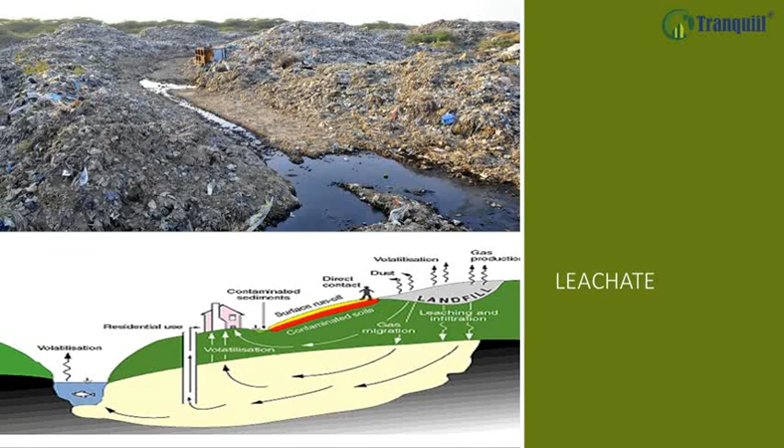Leachate from a landfill varies widely in composition depending on the age of the landfill and the type of waste that it contains. It usually contains both dissolved and suspended material. The generation of leachate is caused principally by precipitation percolating through waste deposited in the landfill. Once in contact with decomposing solid waste, the percolating water becomes contaminated, and if it then flows out of the waste material it is termed leachate.

Additional leachate volume is produced during this decomposition of carbonaceous material, producing a wide range of other materials including methane, carbon dioxide and a complex mixture of organic acids, aldehydes, alcohols and simple sugars.

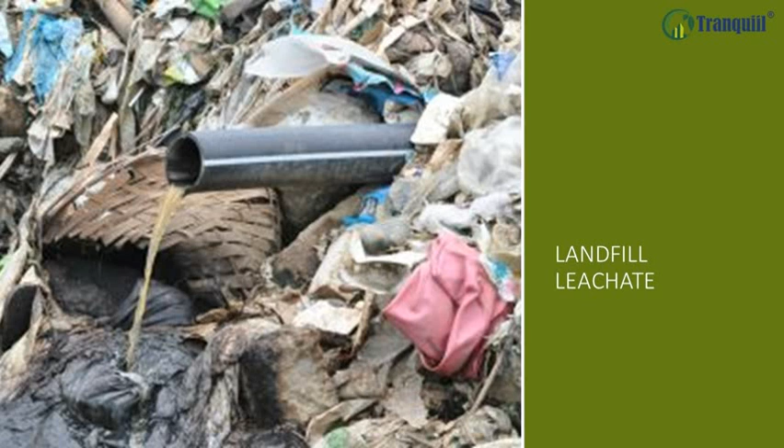The risks of leachate generation can be mitigated by properly designed and engineered landfill sites, such as those that are constructed on geologically impermeable materials or sites that use impermeable liners made of geomembranes or engineered clay. The use of linings is now mandatory within the United States, Australia and the European Union except where the waste is deemed inert. In addition, most toxic and difficult materials are now specifically excluded from landfilling.

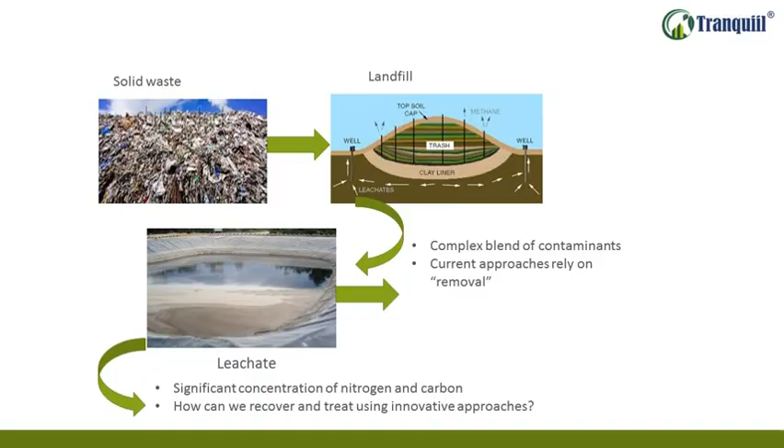However, despite much stricter statutory controls, leachates from modern sites are often found to contain a range of contaminants stemming from illegal activity or legally discarded household and domestic products. When water percolates through waste, it promotes and assists the process of decomposition by bacteria and fungi. These processes in turn release byproducts of decomposition and rapidly use up any available oxygen, creating an anoxic environment.

In actively decomposing waste, the temperature rises and the pH falls rapidly, with the result that many metal ions that are relatively insoluble at neutral pH become dissolved in the developing leachate. The decomposition processes themselves release more water, which adds to the volume of leachate. Leachate also reacts with materials that are not prone to decomposition themselves, such as fire ash, cement-based building materials and gypsum-based materials, changing the chemical composition.

In sites with large volumes of building waste, especially those containing gypsum plaster, the reaction of leachate with the gypsum can generate large volumes of hydrogen sulfide, which may be released in the leachate and may also form a large component of the landfill gas.

In a landfill that receives a mixture of municipal, commercial, and mixed industrial waste but excludes significant amounts of concentrated chemical waste, landfill leachate may be characterized as a water-based solution of four groups of contaminants: dissolved organic matter (alcohols, acids, aldehydes, short-chain sugars, etc.); inorganic macrocomponents (common cations and anions including sulfate, chloride, iron, aluminium, zinc and ammonia); heavy metals (Pb, Ni, Cu, Hg); and xenobiotic organic compounds such as halogenated organics, PCBs, dioxins, etc.

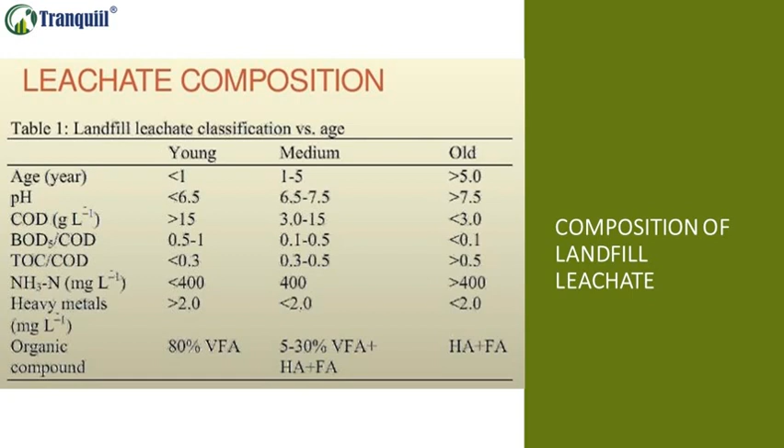In older landfills and those with no membrane between the waste and the underlying geology, leachate is free to leave the waste and flow directly into the groundwater. In such cases, high concentrations of leachate are often found in nearby springs and flushes.

As leachate first emerges, it can be black in color, anoxic, and possibly effervescent, with dissolved and entrained gases. As it becomes oxygenated, it tends to turn brown or yellow because of the presence of iron salts in solution and in suspension. It also quickly develops a bacterial flora, often comprising substantial growths of Sphaerotilus natans.

The primary criterion for design of the leachate system is that all leachate be collected and removed from the landfill at a rate sufficient to prevent an unacceptable hydraulic head occurring at any point over the lining system.

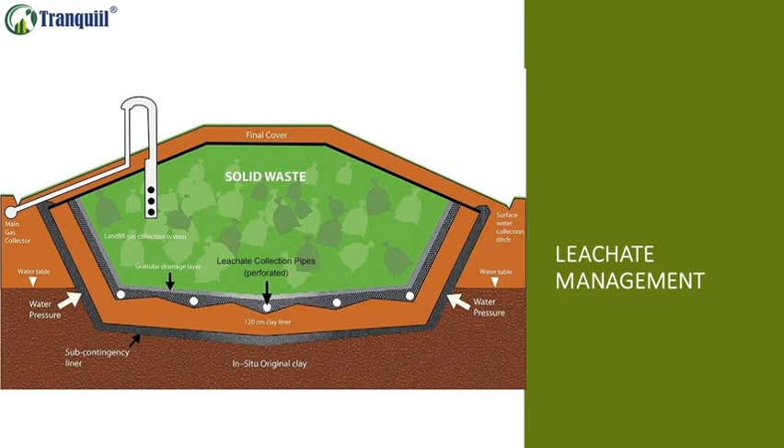There are many components to a collection system, including pumps, manholes, discharge lines, and liquid level monitors. However, there are four main components which govern the overall efficiency of the system. These four elements are liners, filters, pumps, and sumps.

Liners, natural and synthetic liners, may be utilized as both a collection device and as a means for isolating leachate within the fill to protect the soil and groundwater below. The chief concern is the ability of the liner to maintain integrity and impermeability over the life of the landfill. Subsurface water monitoring, leachate collection, and clay liners are commonly included in the design and construction of a waste landfill.

There are several types of liners used in leachate control and collection. These types include geomembranes, geosynthetic clay liners, geotextiles, geogrids, geonets, and geocomposites. Each style of liner has specific uses and abilities. Geomembranes are used to provide a barrier between mobile polluting substances released from wastes and the groundwater.

In the closing of landfills, geomembranes are used to provide a low permeability cover barrier to prevent the intrusion of rainwater. Geosynthetic clay liners (GCLs) are fabricated by distributing sodium bentonite in a uniform thickness between woven and non-woven geotextiles. Sodium bentonite has a low permeability, which makes GCLs a suitable alternative to clay liners in a composite liner system.

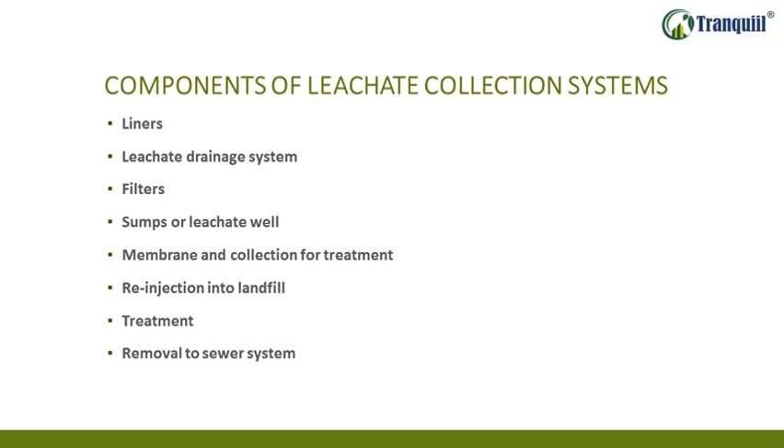Many older leachate streams also contained a variety of synthetic organic species and their decomposition products, some of which had the potential to be acutely damaging to the environment. The risks from waste leachate are due to its high organic contaminant concentrations and high concentration of ammonia. Pathogenic microorganisms that might be present in it are often cited as the most important, but pathogenic organism counts reduce rapidly with time in the landfill, so this only applies to the freshest leachate.

Toxic substances may, however, be present in variable concentrations, and their presence is related to the nature of the waste deposited. Most landfills containing organic material will produce methane, some of which dissolves in the leachate. This could, in theory, be released in poorly ventilated areas in the treatment plant. All plants in Europe must now be assessed under the EU ATEX directive and zoned where explosion risks are identified

to prevent future accidents. The most important requirement is the prevention of the discharge of dissolved methane from untreated leachate into public sewers, and most sewage treatment authorities limit the permissible discharge concentration of dissolved methane to 0.14 mg/L, or 1/10 of the lower explosive limit. This entails methane stripping from the leachate.

The greatest environmental risks occur in the discharges from older sites constructed before modern engineering standards became mandatory, and also from sites in the developing world where modern standards have not been applied. There are also substantial risks from illegal sites and ad hoc sites used by organizations outside the law to dispose of waste materials.

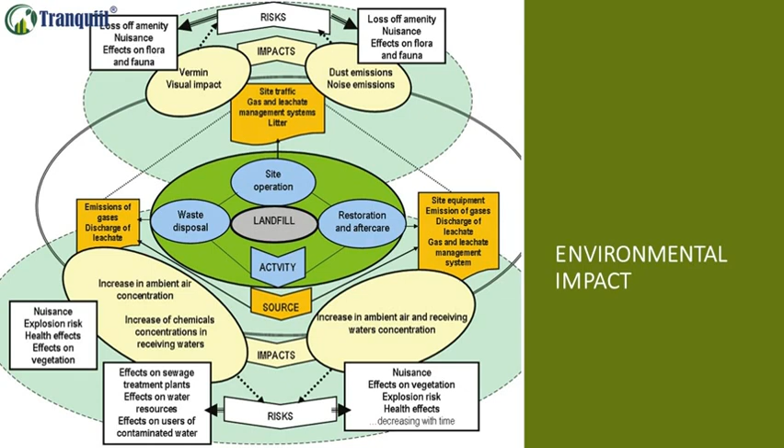Landfill leachate contains a large amount of organic matter and ammoniacal nitrogen. As such, it has become a complex and difficult issue within the water treatment industry. The activated sludge process has been found to be a good solution with low processing costs and is now therefore the core process for leachate treatment, especially for nitrogen removal. Treatment of leachate using the activated sludge process includes the removal of organic matter, ammoniacal nitrogen, and total nitrogen (TN).

The core method for the removal of organic matter involves anaerobic treatment supplemented with an aerobic process. Ammoniacal nitrogen is commonly removed using the conventional aerobic treatment, and advanced TN removal is achieved using endogenous denitrification or an anaerobic ammonium oxidation (ANAMMOX) process. Since biological processes are the most economical method for TN removal, a key issue is how to tap the full potential of the activated sludge process and improve TN removal from leachate.

Treating landfill leachate. Since leachate contains large amounts of organic matter and ammoniacal nitrogen, general disposal methods have included physical and chemical pretreatment followed by aerobic and anaerobic biochemical processes, concluding with further physical and chemical methods for final in-depth treatment. The main functions of pretreatment are to remove suspended solids, degrade some of the organic matter and ammoniacal nitrogen, reduce toxicity, and improve the overall biodegradability of the leachate. This is achieved through coagulating and stripping the ammoniacal nitrogen from the leachate.

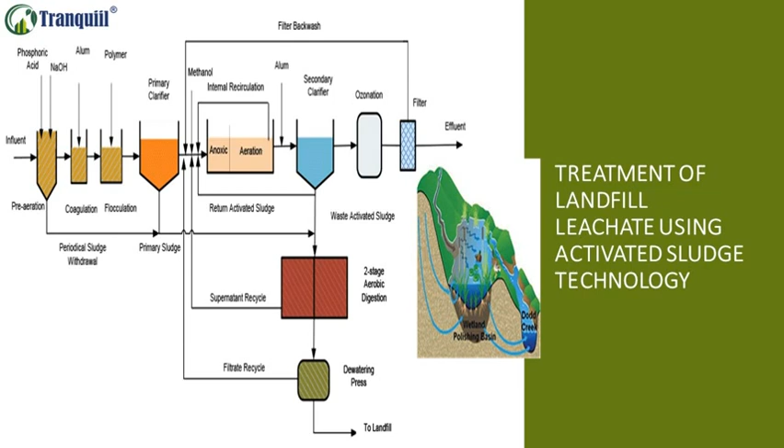In physicochemical treatment, the separation of suspended particles from the liquid phase is usually accomplished by coagulation, flocculation and sedimentation. Coagulation-flocculation processes have been widely used as alternative treatment to remove leachate pollutants such as BOD, COD, TSS, heavy metals, color, and nitrogen compounds prior to other treatment methods. It is often coupled with treatment methods like biological process, chemical oxidation, adsorption or filtration to achieve desirable effluent quality.

In spite of being economical, the dewatering and disposal of the precipitated sludge could be laborious and time-consuming. In this manuscript, coagulants and coagulant aids in landfill leachate treatment are briefly discussed with respect to their mechanism. Coagulation is generally defined as destabilization of a colloidal suspension or solution.

On the other hand, flocculation is the process whereby the destabilized particles are propagated to gather and agglomerate into larger flocs. Although coagulation and flocculation are two distinct processes, they have been used interchangeably due to the confusion resulting from the water treatment industry itself. The same goes for the terms coagulant and flocculant. However, it is pertinent to assert that coagulant is often used to describe any substances that can induce both coagulation and flocculation.

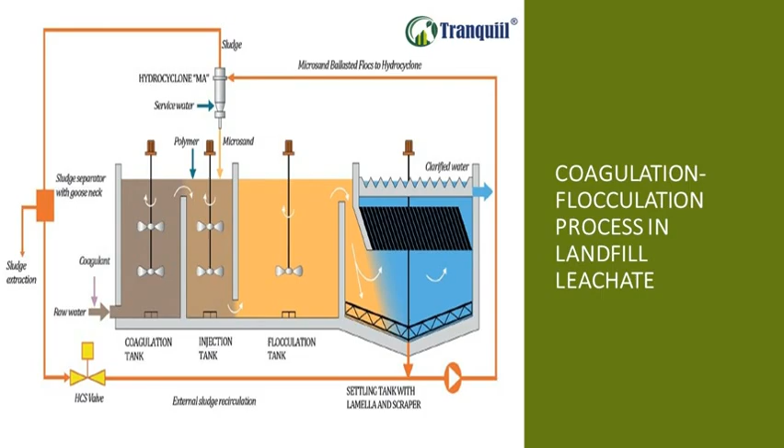Despite recent advancement of landfill leachate treatment technology, it is well perceived that coagulation and flocculation is still predominant for the treatment of landfill leachate and is widely practiced by many landfill operators. Accordingly, it is assumed that prehydrolyzed coagulants such as PACl, PFCl, PFS and PAFCl can be considered as the superior coagulants due to better color removal and high pH affinity towards leachate. In fact, ferrous sulfate can also be considered as a better coagulant over other metallic salts.

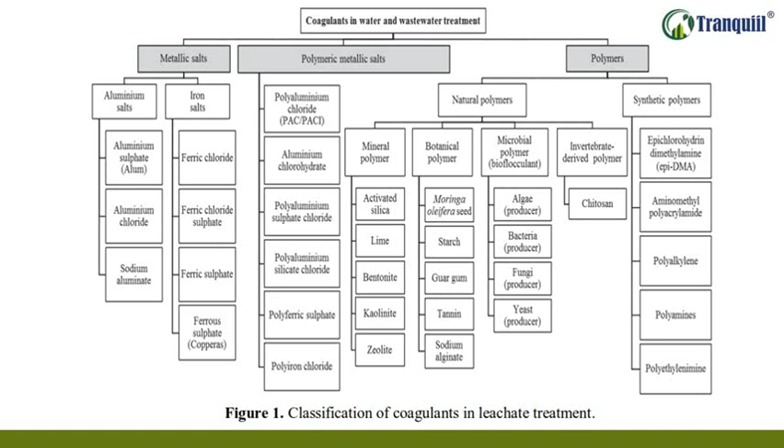Having said that, the emergence of starch-based coagulants in leachate treatment is seen as a promising approach which can reduce dependence on pure coagulant and can effectively reduce sludge production during the flocculation process. However, until now, the applicability of the discussed coagulants is yet to be documented and extensively discussed. Further studies are required to evaluate their application for landfill leachate treatment with respect to the broad range of parameters that need to be observed according to the Department of Environment permissible discharge limit.

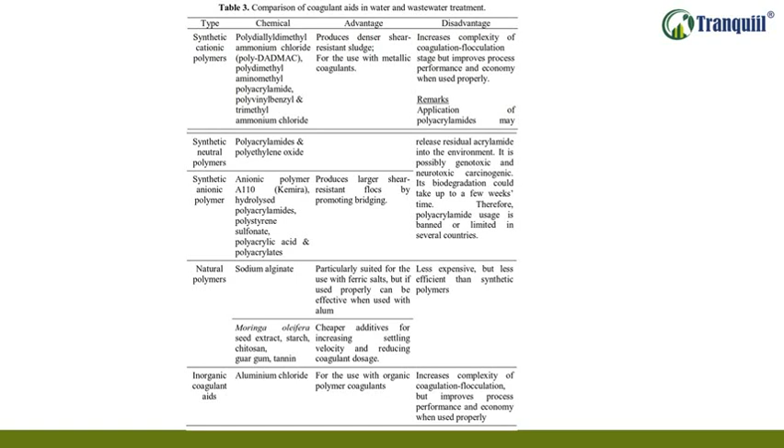The function of the subsequent biochemical stage is to remove the biodegradable organic matter and ammoniacal nitrogen. The core technologies in these biochemical processes are, for example, the upflow anaerobic sludge blanket UASB, membrane bioreactors MBR, the anoxic-oxic A/O process, and sequencing batch reactors SBR. The later deep treatment of leachate further removes organic matter and TN and can include Fenton oxidation, electrochemical processes, activated carbon adsorption, and membrane treatment processes.

This largely biochemical disposal method results in most biodegradable organic compounds and ammoniacal nitrogen being removed, along with a portion of TN. However, the leachate water still contains a large amount of refractory organic compounds and some TN. In order to achieve current discharge standards, double membranes using nanofiltration and reverse osmosis are employed as safeguards.

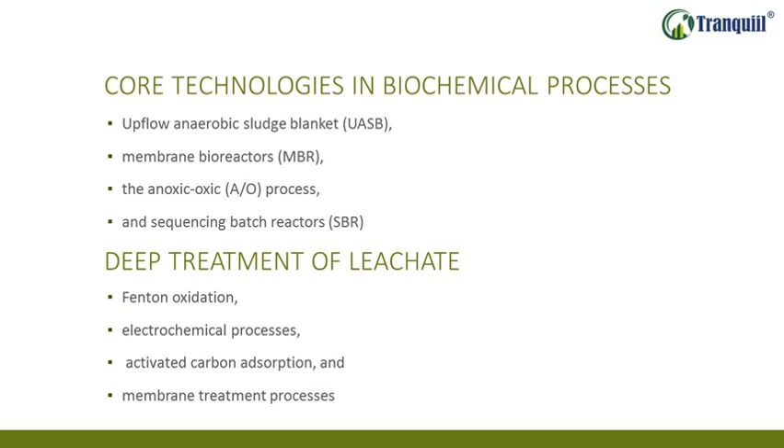The removal of organic matter by activated sludge: leachate contains a considerable amount of both biodegradable and non-biodegradable organic matters. Activated sludge processes can effectively remove biodegradable organic material by completely converting it to carbon dioxide and water. The process can involve anaerobically or aerobically activated sludge. The advantages of an anaerobic process are that it has low energy consumption and can produce energy itself. The disadvantages are that effluent COD is high and retains some biodegradable organic matter.

Alternatively, the advantages of an aerobic process are high biodegradation and organic removal rate, as well as good water quality. A disadvantage is high energy consumption throughout the process. Anaerobic activated sludge process. The anaerobic activated sludge process for treating landfill leachate can include upflow anaerobic sludge blanket UASB, anaerobic membrane bioreactor MBR, and expanded granular sludge blanket reactor EGSB.

The UASB process results in high removal efficiency and large volumetric loading. This method is therefore often used to treat leachate with high organic content. Anaerobic MBRs contain a high concentration of sludge and the effluent quality from this process is good. The EGSB, a third-generation anaerobic reactor, has the characteristic of high volumetric loading.

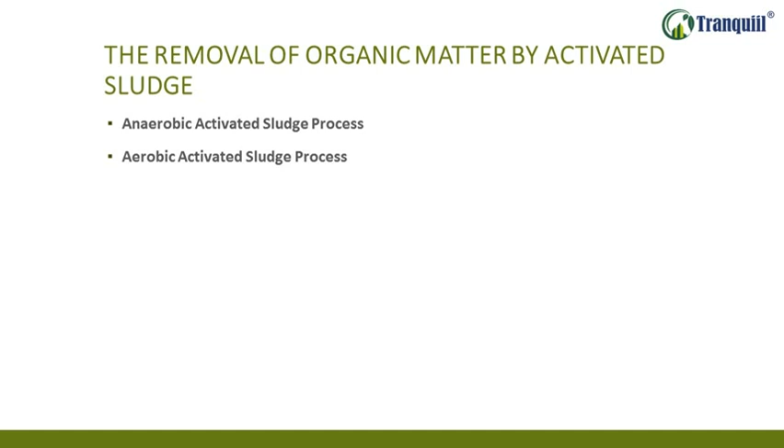The removal of ammoniacal nitrogen by activated sludge. Ammoniacal nitrogen found in leachate typically exceeds 1,000 mg/L, although some leachates contain even higher levels of up to 3,000 mg/L. Significant discharge of ammoniacal nitrogen directly into the surroundings can cause great harm to the environment and especially local groundwater systems.

Many developed countries have devised strict emission standards in regard to landfill leachate. As a result, the cost-effective removal of ammoniacal nitrogen from landfill leachate has been a significant challenge for the water treatment industry. Accordingly, activated sludge processes have been key methods in ammoniacal nitrogen disposal because of the low associated costs and low secondary pollution. Ammoniacal nitrogen removal by SBR is the preferred process used for landfill leachate ammoniacal nitrogen disposal. Granular sludge sequencing batch reactors (GSBR) provide a new process with high rates of nitrogen removal.

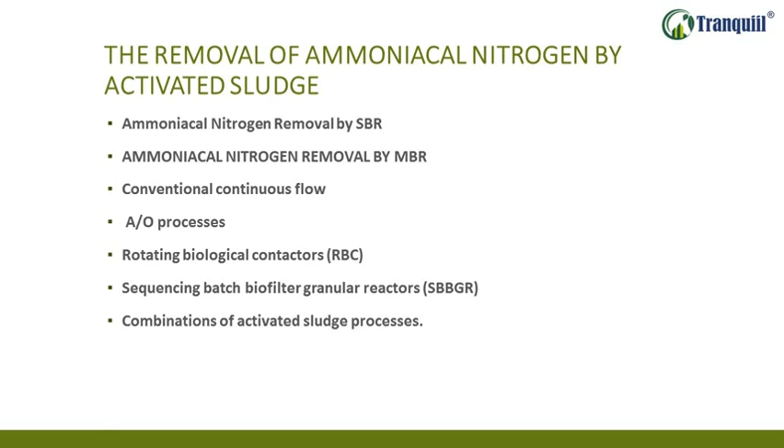Conventional activated sludge processes might achieve the ammoniacal nitrogen emission standards for landfill leachate. However, leachate organic matter is depleted during the nitrification process, which poses significant challenges for traditional denitrification processes. In order to solve the problem of TN removal, a number of researchers identified that adding a further carbon source could initiate advanced denitrification. However, the cost of this approach was considered too high and not applicable in engineering scenarios.

In order to reduce processing costs for TN removal, researchers have used more advanced treatment processes in recent years, such as endogenous denitrification and the anaerobic ammonium oxidation process (ANAMMOX). These processes can not only meet the requirements of leachate TN removal but also have low associated costs. This is of great significance to meet the needs of the industry and to promote further development of landfill leachate treatments. TN removal by endogenous denitrification.

Denitrifying bacteria are able to maintain the carbon source during leachate treatment. When sewage has no external source of carbon on which it might draw, this kind of bacteria uses internal carbon sources from within itself for denitrification. If this characteristic could be successfully enhanced, advanced denitrification could be achieved for landfill leachate without the addition of an external carbon source. In conclusion, advanced nitrogen removal can be achieved through endogenous denitrification. The disadvantage of this process is that it can only treat early and medium-term leachates with a C/N ratio that is greater than 4. If the C/N ratio is below 4, the technology cannot be used.

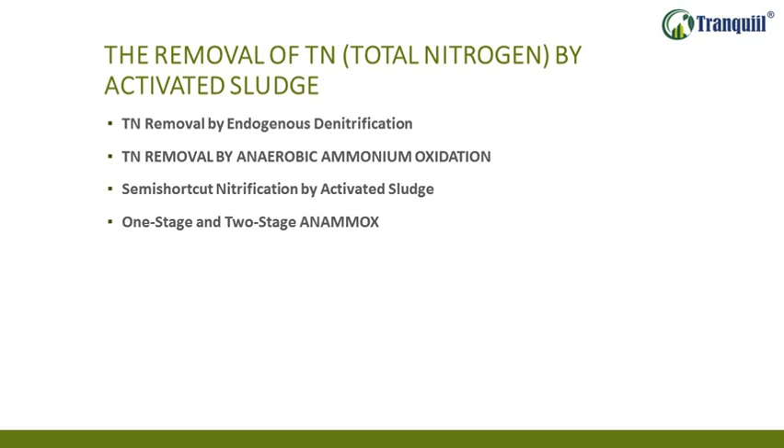To our knowledge, there are no studies reporting photocatalytic UV/TiO2 pretreatment enhancing biodegradability of refractory organic compounds in a complex medium such as landfill leachate. We used the SBR to couple the biological and photocatalytic treatments to improve the biodegradability of the landfill leachates. The SBR stage of biological treatment resulted in nitrification, oxidation of ammonia to nitrite and nitrate, and removal of biodegradable organics from the leachate. At the end of photocatalytic treatment, a total decoloration was observed.

COD and TOC significantly decreased, ensuring their low concentration, below the threshold value for direct discharge of leachate according to the legal restrictions amounting to 125 mg O2/L and 30 mg C/L, respectively. Photocatalysis brought about conversion of refractory organics from the landfill leachates into readily biodegradable species, BOD. It was proved that the BOD fraction formed in that way can be removed via aerobic biological oxidation.

Similarly, the organic fraction BOD can be used by heterotrophic denitrifiers during the reduction of nitrite or nitrate to N2. However, the amount of biodegradable species provided to denitrifying bacteria from the photocatalytic stage will not allow to meet the standard with respect to N concentration.

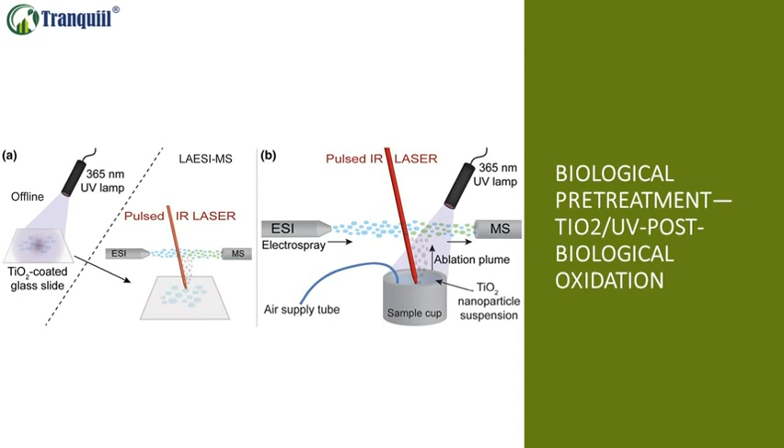Landfill leachate treatment technology reduces landfill leachate volumes at brine concentrations in excess of 30% solids by mass, outside reverse osmosis range. SaltMaker evaporator crystallizer pilot projects completed with 4 top U.S. solid waste management companies produce fresh water to meet regulatory requirements and generate highly concentrated brine or solids for return to landfill. The SaltMaker evaporator crystallizer technology is built for reliability and extreme brine concentrations, multiple effect for energy efficiency, burns 1/4 the gas versus conventional leachate evaporators without the emissions, modular/portable and easy to operate, no steam tickets.

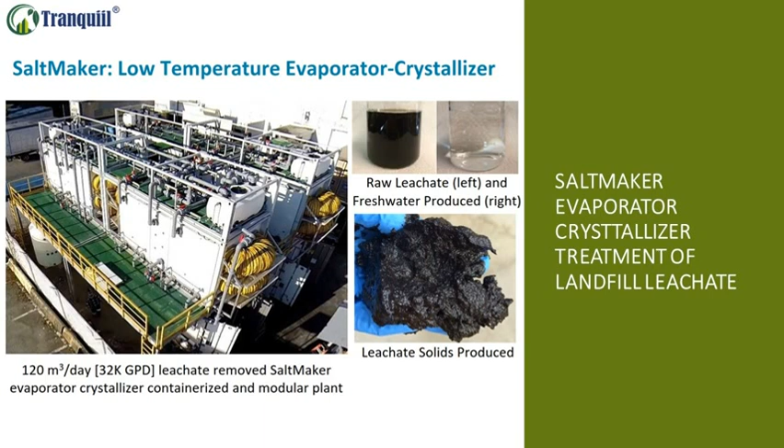SaltMaker evaporator crystallizer process: four effects to recycle heat of evaporation, burn 1/4 the gas. Landfill gas-fired packages available. Effects 1 to 3 closed to atmosphere, no leachate air emissions, and effect 4 used for cooling as a cooling tower. Effect 4 can be closed for 0 leachate air emissions.

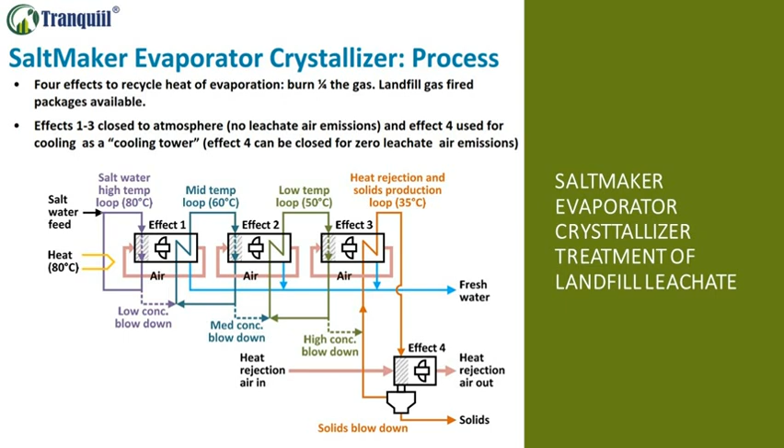SaltMaker evaporator crystallizer attributes: no membranes, no pretreatment, solves conventional evaporator crystallizer reliability problems, scaling, no evaporation on hot tubes, no boiling induced scale, non-stick/non-corrode gel-coated fiberglass construction, plugging and organics, high circulation rate, low temperature, self-cleaning, maintainability, built-in automated cleaning cycles, no pressure vessels, no confined spaces, modules remove readily, spare parts stocked in Canada. Automation, intelligent

self-start/stop/clean. SaltMaker evaporator crystallizer pilot produced freshwater meeting discharge limits, and solids or concentrated brine with 45 to 60% total solids, 100% reliability, 24/7 remote operations, 90-day continuous run. Post-treatment of high ammonia waters may be required. Ammonia is volatile and can be suppressed by pH or post-treated.

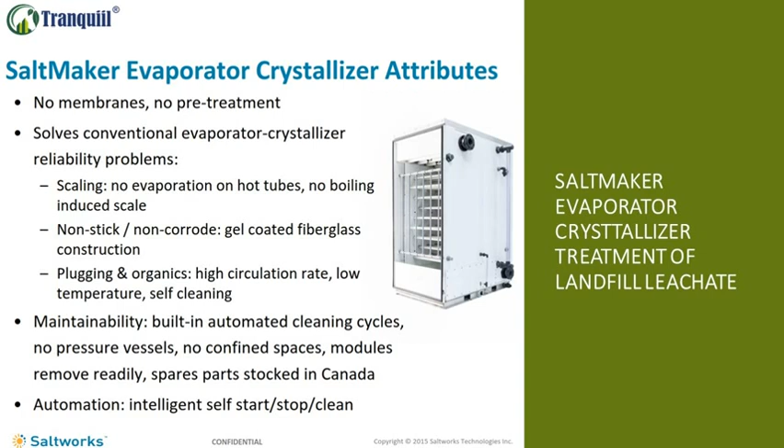Many waste treatment facilities are located in mountain areas, and therefore, sufficient consideration to the surrounding environment is needed to keep clear streams as well as our source of water. What is required to take preventive actions against seeping water emitted from those facilities is, indeed, advanced water treatment technology that is strongly backed by science and technology. DT module system is a water treatment technology using reverse osmosis membrane which is utilized for production of ultra-pure water for seawater desalination and semiconductor.

With this advanced technology, we will be able to contribute to environment protection in these areas by implementing a water treatment system that can handle leachate discharged from waste treatment facilities safely with stability. Features: simple process. Treated water is as safe as natural water, very economical. Adding pressure to the raw water side, partitioned by reverse osmosis membrane.

RO membrane can make only water, H2O, penetrate through the RO membrane. By using this mechanism, salts and organic materials contained in raw water can be removed. This is the reverse osmosis method, RO method. In addition, the cross-flow system can prevent the membrane from contamination and clogging.

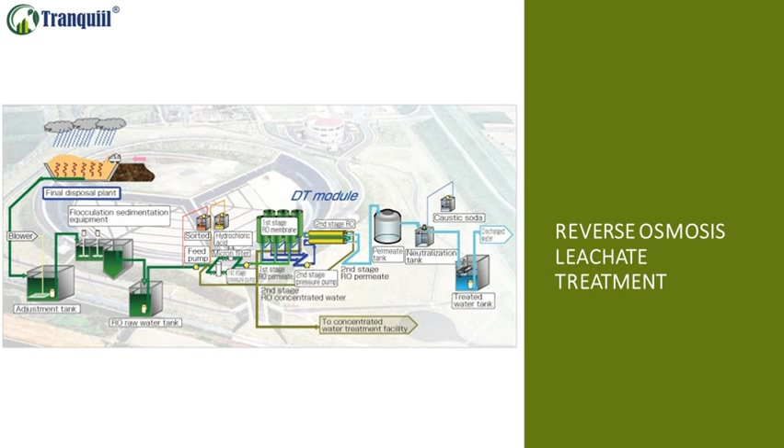We recommend two cost-effective and simple processes: coagulation, RO, composting; and coagulation, spray drying, composting, wherein leachate is passed through a coagulation and flocculation stage. Flocculated sludge is collected and sent for composting with aerobic microorganisms, and filtrate is then passed through reverse osmosis or a spray drying process. RO-treated water is as safe as natural water, whereas RO waste is treated for composting with aerobic microorganisms.

In spray drying of filtrate after coagulation, the water will be evaporated to air and spray-dried leachate will be treated with aerobic microorganisms for composting. All the above composted matter can be used for agricultural purposes.

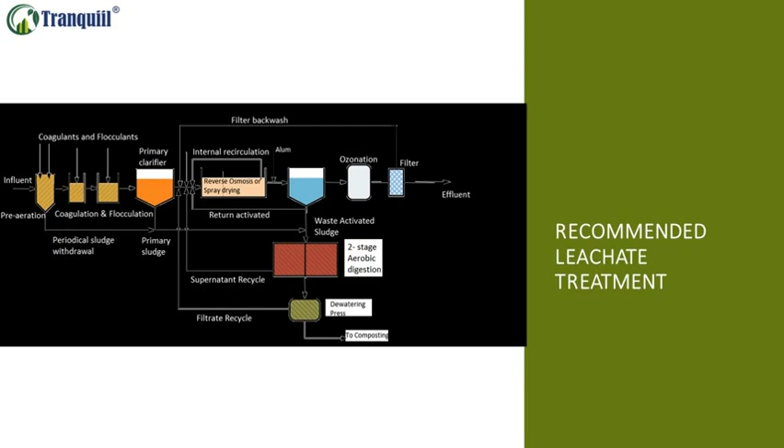Problem statement: sanitary landfilling is the most common way to eliminate solid urban wastes. An important problem associated with landfills is the production of leachates. This study is a review of landfill leachate treatments. Approach: the advantages and disadvantages of the various existing leachate treatments are discussed under the items:

I, leachate channeling: combined treatment with domestic sewage, recycling; II, biological processing: aerobic and anaerobic; III, chemical/physical treatment: flotation, coagulation/flocculation, chemical precipitation, adsorption, ammonium stripping, chemical oxidation, ion exchange and electrochemical treatment; IV, membrane filtration: microfiltration, ultrafiltration, nanofiltration and

reverse osmosis. Conclusion: the major fraction of old or biologically treated leachate was large recalcitrant organic molecules that are not easily removed during biological treatment. So, in order to meet strict quality standards for direct discharge of leachate into surface water, the development of integrated methods of treatment, the combination of biological, chemical, physical and membrane process steps, was required.

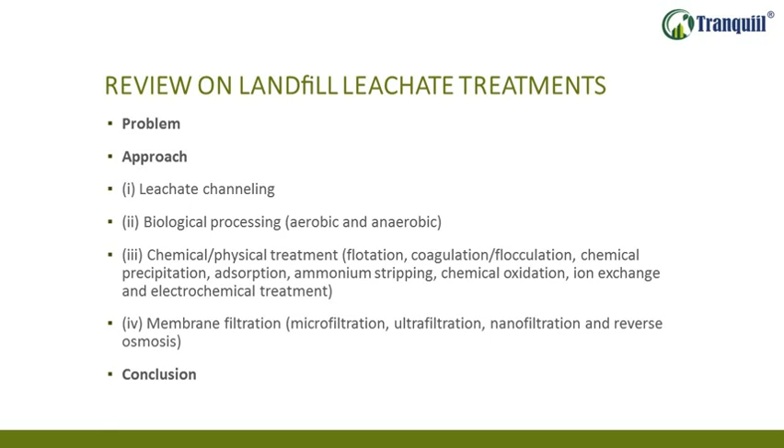Today, the use of membrane technologies, more especially reverse osmosis (RO), either as a main step in a landfill leachate treatment chain or as a single post-treatment step, has been shown to be an indispensable means of achieving purification. Optimal leachate treatment, in order to fully reduce the negative impact on the environment, is today's challenge. But the complexity of the leachate composition makes it very difficult to formulate general recommendations.

For many years, conventional biological treatments and classical physico-chemical methods have been considered the most appropriate technologies for manipulation and management of high-strength effluents like landfill leachates. When treating young leachate, biological techniques can yield a reasonable treatment performance with respect to COD, NH3-N and heavy metals. When treating stabilized, less biodegradable leachate, physico-chemical treatments have been found to be suitable as a refining step for biologically treated leachate in order to remove organic refractory substances.